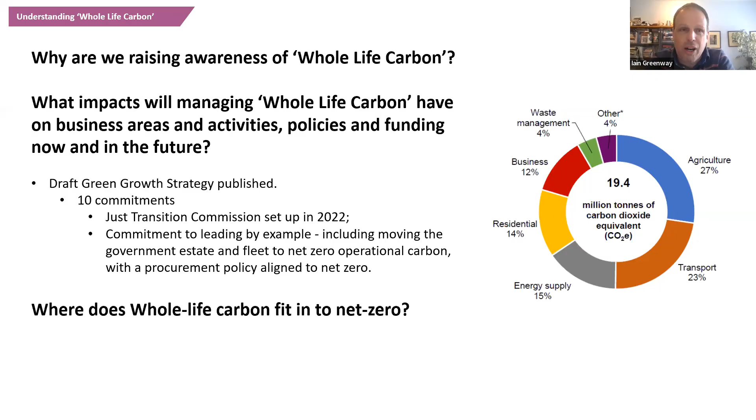So why are we talking about this at all? Why are we all here this afternoon? Well, we have now got a very demanding Climate Change Act in Northern Ireland. It sets targets beyond where the science can currently get us to. It's certainly a good definition of a stretch target. And you can see on the chart on the right of the screen that buildings account for a big chunk of that carbon, 14% there for residential and how it's split up. But you'll understand that some of the other parts of that pie chart include buildings apart from just the residential. So this is a significant part of our overall climate change challenge in Northern Ireland.

This diagram shows a very similar thing, but in a different form around a loop rather than in those building blocks. And you can see the operational carbon going, as I would say, from 8 o'clock to 10 o'clock on that loop. And you can see Carl Elefante's statement. As with all of these statements, it's perhaps oversweeping and an overgeneralization, but certainly we need to see the whole life, the whole cycle, and that probably hasn't been focused on sufficiently.

If I just take that back to the example we're going to hear about, the Erne campus, and Barry's going to talk about the tremendous world-leading work there to create a further education passive house standard building. But what was on that building site before? It was a 1960s hospital. That had to be demolished. What was the carbon impact of that?

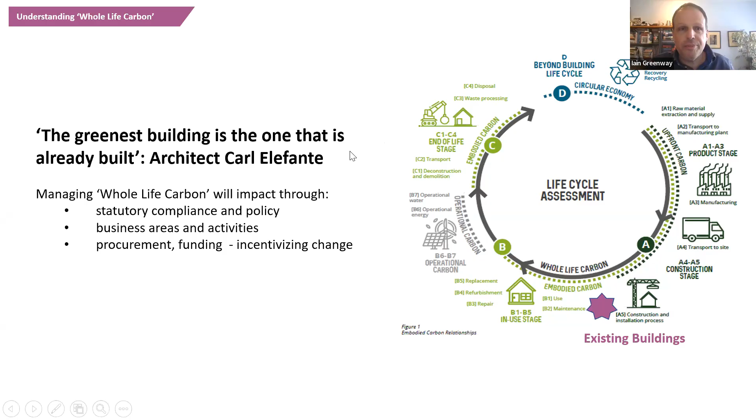And here are some points perhaps we can all think about as we hear the presentations and the discussion, including what leadership role we want to have, whether we work in the public sector or the private sector or the third sector. What is the role we want to play in getting this broader understanding, this broader focus, and indeed then this broader action to deliver on what we know we need to deliver for the planet as well as for legislation? What do our baselines look like? How do we audit to know how we're doing?

So hopefully this slide will give you a few pointers to think about, things to reflect on as you hear the other presentations. And a couple of slides very quickly to give you a sense of the broader pieces of work the Department for Communities is doing and how we're doing them. Departmental Management Board, DMB, as it says there, is actively interested and recognises its responsibilities around climate change, for instance. There has been some funding to move on with some electric vehicles and some solar panels, for instance.

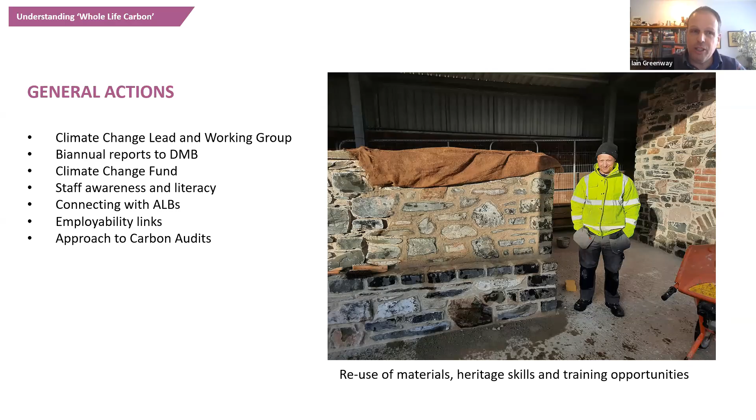And it's a pleasure for me now to introduce Professor Aoife Wiberg from Ulster University to get us into this subject more fully. I'm going to stop screen sharing and hope that I see Aoife emerging from her bubble on the screen. Aoife, are you there? Yes. Over to you, Aoife. You okay there? Yes, there we go. Okay, are we live? We are.

Okay, so I'd like to welcome everybody to the Embodied Carbon workshop. So we're trying a little bit of an experiment here. We have 110 delegates online, and we're trying to Zoom this together with you. So I shall begin. My name is Professor Aoife Houlihan-Wiberg, and I'm Director of the Architectural Research Group at the Belfast School of Architecture at Ulster University. Today I'm going to talk about embodied carbon and net zero greenhouse gas emissions in buildings and communities. So it's really about knowledge building for industry and academia.

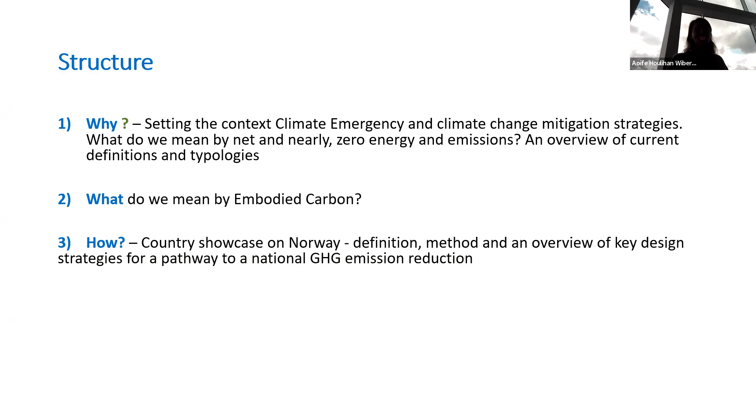So as you all know, we have a climate emergency which has been declared worldwide, and this has now been implemented into many local governments and jurisdictions. A lot of this has been already covered by Dr. Adrian Pugsley, but just to reiterate that the reduction of energy use and greenhouse gas emissions in the building sector is an urgent priority to limit global warming to less than 1.5 degrees centigrade in this century. So in response to this, a climate emergency has been declared. But I'd like to just begin with what do we mean by a climate emergency? This is defined as a situation in which urgent action is required to reduce or halt climate change and avoid potential irreversible environmental damage resulting from it.

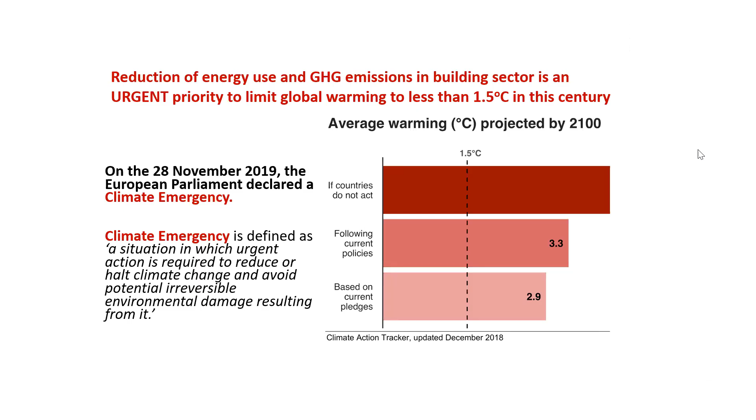So the global impact of buildings: building construction and operation accounts for almost 40% of global final energy use and almost 40% of energy-related CO2 emissions. So therefore, improving the environmental performance of the building stock and developing zero-emission buildings are really critical to avoid an increase in energy use and greenhouse gas emissions.

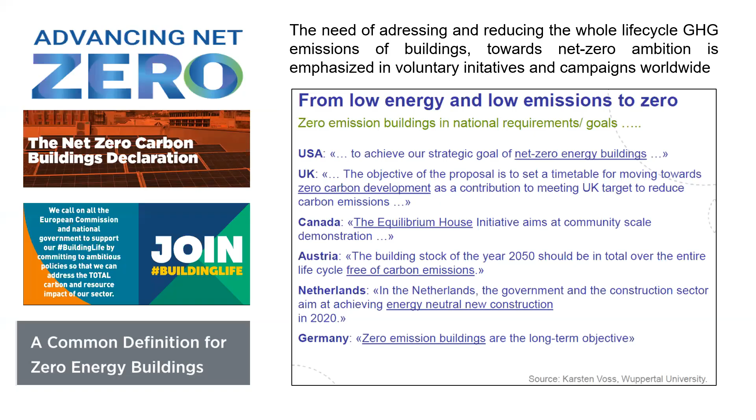So in the UK, a law has already been passed for net zero emission by 2050. So it's become the first economy in the world to do so. So it's not the only country. Every country in the world is really engaging and developing its own pathway and definition. So I'm just giving you a flavor of some from around the world.

But what you can see also, for example, to bring it a little bit closer to home, you have the UK Green Building Council. You can go onto their website and you can see that they give a definition on net zero carbon, and they do these really nice country profiles. So you can just click into Advancing Net Zero Snapshot and look at the different approaches around the world. So that's very accessible, and you should definitely share that with your organizations.

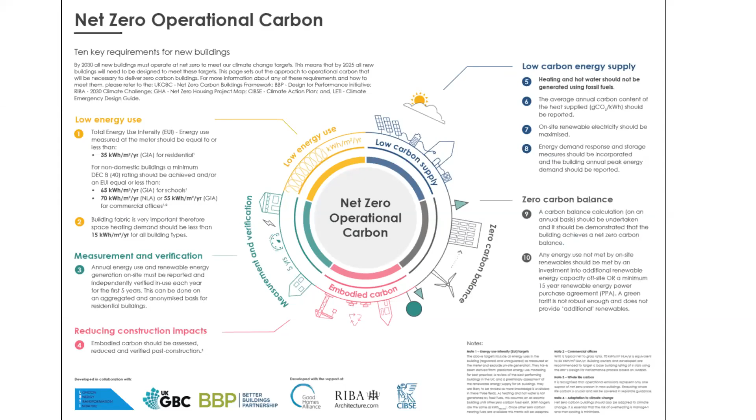As well as that, we have LETI, which Adrian spoke about already, and what they've developed is a really easy to understand embodied carbon primer. So again, we'd recommend that you go onto their website. It's very easy to understand, and again, share it with your organizations.

But, you know, with all these different pathways and definitions around the world, of course, it's starting to become a little bit of a Wild West, and it's a little bit confusing, I think, for organizations to really understand which pathway should we be following, what is really understood by these definitions. So I won't go into too much detail here, but just to let you know that I'm part of this International Energy Agency, Annex 72. And within that, we have a work package where we have conducted a survey of all these definitions around the world.

And what we're trying to do is to firstly get an understanding of what that definition means. For example, what are the boundary conditions that are included? Which metric are they using? Are they talking about energy only, or are they including embodied emissions? And what we want to get out of that is to develop a more transparent and standardized approach. So it's like an international definition framework, which different organizations around the world could refer to. And the idea then is that having a more standardized approach will mean that we'll have fewer misunderstandings and more reliability in those definitions, and hopefully avoid greenwashing.

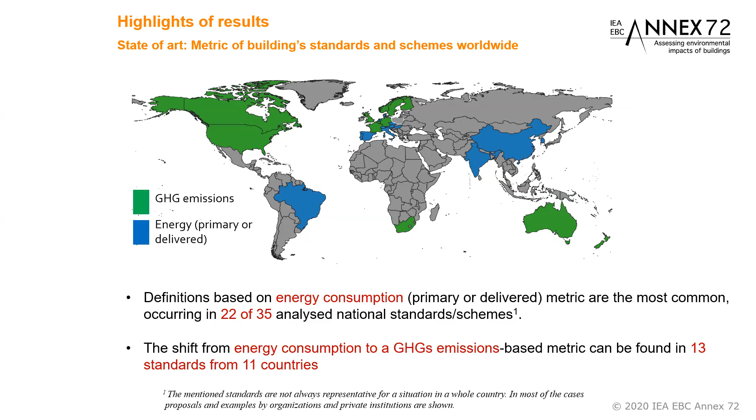So out of the 35 countries that we analyzed, what we found was that 22 of the 35 have definitions in place that are focused on zero energy. So those are shown in blue. But equally, what we found is that we have 13 standards from 11 countries which have made that shift to a definition that's including greenhouse gas emissions. So that's a really positive step. Again, there are 35 different schemes.

I won't go into it, but just to give you a flavor and a highlight, I've taken 4 countries here, and you can see that the definition is different. Some are talking about zero carbon, some are talking about zero energy, some are talking about net zero emission. So what that essentially means is that in some countries we're talking about just zero energy, and in others they're talking about including emissions from operation and embodied emissions from materials. So there are 2 different pathways. And some are calculating that on an annual basis, some over a 60-year period. So it's just to highlight these differences.

And what is interesting is that all of them are actually voluntary at the moment. And what we're seeing also is that a lot of the initiatives are coming from industry or research councils. So there's a real opportunity for industry partners and research organizations to actually be making a difference and leading the way.

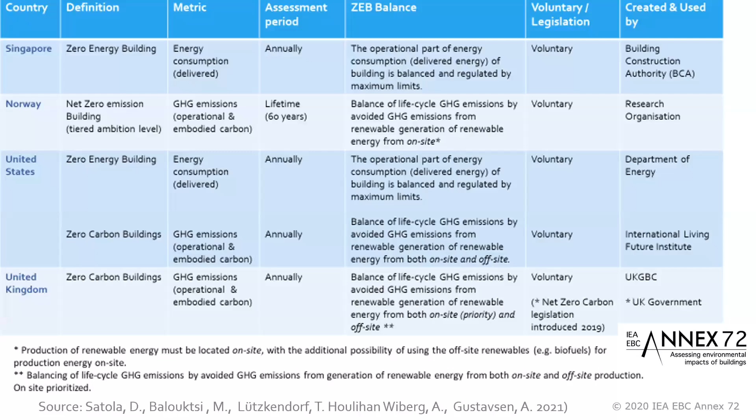So this is just showing you the different building standards and schemes, and these are all the ones that are referring to greenhouse gas emissions. But even within that context, you can see those different definitions. Some are using zero carbon, some are talking about net zero emission.

But the main recommendation from this is, regardless, there's a lot of momentum and a lot of initiatives worldwide, but all of these standards, schemes and approaches need standardization, and we need to start integrating this into national and local policy. But another key thing that we found is that different countries are at different stages of the game in terms of what they can practically do. So it's really important to have that framework and have flexibility within the framework, so different countries can all make a step, but at different stages. And then finally, in terms of compensating for the emissions used in a building, we shouldn't just focus on on-site compensation, because this isn't always possible to do at a building level.

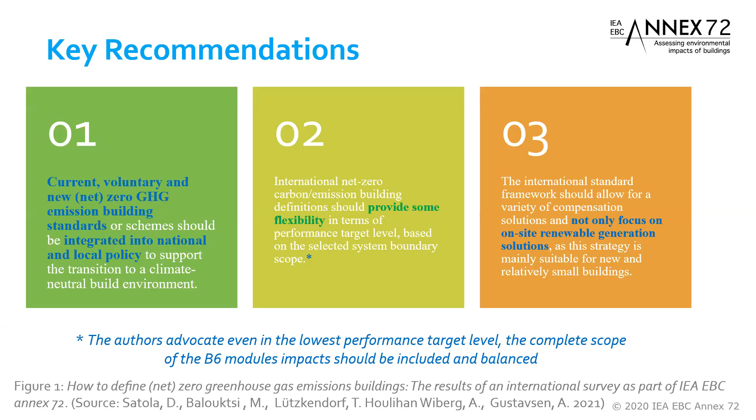And sometimes, that's more applicable for new buildings, but many countries are dealing with a lot of existing buildings. So we need, again, more flexibility on the possibilities. So you can read more about this on the link attached. So that's just giving you a little bit of a whistle-stop tour to the international perspective.

And then I just wanted to really now start in the second part on embodied carbon. So what do we mean when we talk about embodied carbon? So we define this in the IEA as the energy used in and the greenhouse gas emissions from manufacturing the construction materials, constructing, maintaining, refurbishing, and demolishing the building. So that is basically visualized with that image, the small diagram on the left. So everything included in the red circle is to do with the embodied emissions.

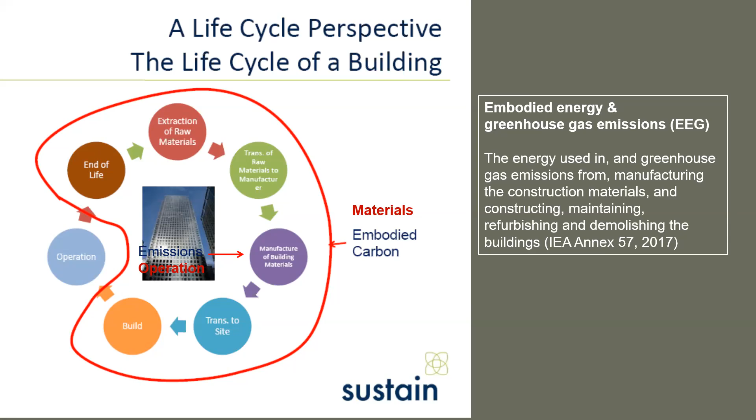So it's everything from taking the materials out of the ground, transporting to the factory, processing in the factory, transporting the material then to the site, which could be in another country. So you've got transport emissions. Then you're starting to construct it in the building. Then at the end of the life of the building, you demolish it, and then the further use. So all of this is the embodied emissions. And then, of course, we have the emissions from operation.

So this has also been touched upon already, but just to let you know that, when we calculate embodied emissions, we call this the life cycle analysis, and we do this according to standardized approaches. So this is showing you the standard that should be used, EN 15978. And what you can see there is A1 to A3 are the production phase emissions, A4, 5 is transport and construction emissions. Then you have the use stage emissions, so they're B1 through to B7, the end of life, the C modules, and then the benefits and loads beyond the system boundaries.

So that means if your building was deconstructed, if it was made out of timber, you may decide to send the timber to a waste facility where the timber is burned and that waste heat is used for heating a neighborhood. So that's kind of the next steps. So how do we measure this? So the unit that we use is kilogram of CO2 equivalent, and that can be per functional unit, which is per meter squared, per meter, per kilogram, etc.

And why is this important? Because for designers and other stakeholders, it's really important, particularly if it's integrated early in the design process, then we can see what the impact is from the different components used in a building. So that's very useful if this is done early in the design process, because you can go back to the drawing board if you start to see certain materials or components are driving high emissions.

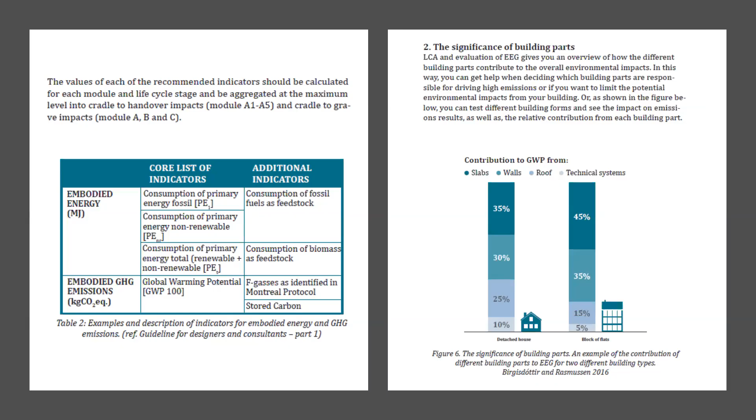And again, this has been touched upon already, but just to let you know, as we're shifting towards net zero emission buildings, they're becoming more and more highly energy efficient. And how they achieve that is using typically materials, the burden is shifting more to the embodied side. So what we see in zero emission buildings is that the emissions from operation are being reduced, but the burden is now shifting to the embodied emissions part for the materials used in the building and all the technical systems.

So why is this interesting? Well, it's interesting because if you're only looking at balancing the energy demand and you're not considering the embodied emissions of the material part, then you're missing the bigger part of the picture. So that's why we need to make this shift from thinking about nearly zero energy or net zero energy to a more life cycle approach. And another interesting thing when you're calculating embodied emissions and the LCA is that you can start to see a picture as well of where the emissions are happening in the life cycle of the materials.

So what you see, for example, if you do your LCA, is that you might have chosen materials that have high embodied emissions in the production phase. And so then you might think, well, okay, that could be concrete or any other material. I'm not saying just concrete, but it could be a material that is energy intensive. And then you might look, could I use a less intensive material for those production phase emissions? And so you help to reduce that part of the life cycle.

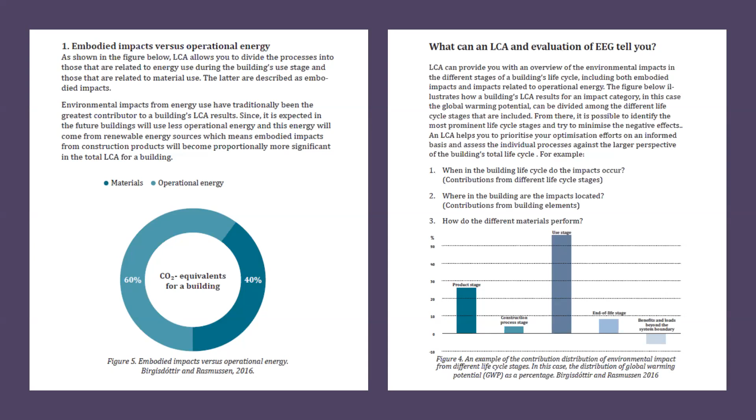And another part is, for example, as a designer, instead of choosing a material from far away, you may choose materials closer to your site. So you've got an opportunity then to reduce the emissions from the transport phase. Or instead of a highly technical or intensive production phase material, you might switch it for a more natural material like timber or something else. And again, you can reduce the emissions for that phase.

So you start to get an idea of what is the impact from the materials that I've chosen for the skin of the building, for the technical equipment, could be mechanical and ventilation systems. So what you can do then is, if it's done early enough, you can go back to the drawing board and switch out those materials that might be driving high emissions, and sort of do the sensitivity analysis for other materials. So how we do that is we tend to connect our 3D models with databases that have all this information on embodied emissions.

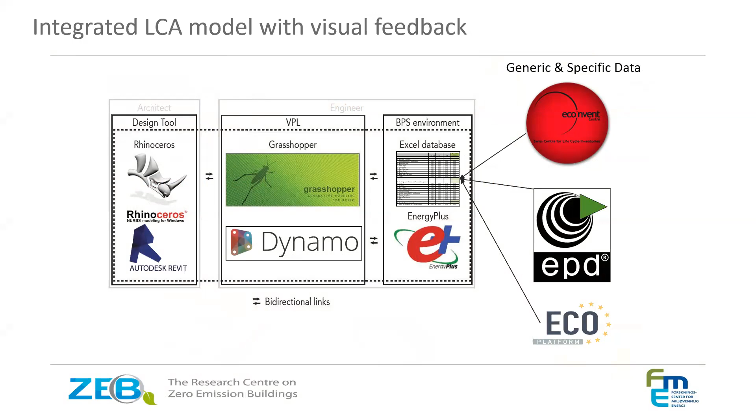And I'll go in a little bit on this, but you can use generic data, which is kind of more average data, particularly in the early design phase when you don't really care where exactly that particular material is coming from. But as you go further into the design, you may wish to switch it for specific data from what we call environmental product declarations. I'll go into that in a minute, but essentially what we need to do any embodied carbon calculation is material quantities. So you can typically get that from a 3D model.

But what I like to say to students is that you shouldn't rely on just tools available online. You really need to understand from the basics. So you can actually just get quantities from a drawing. You can measure quantities for a wall or an area of wall. And then if you know where to get the data from the environmental product declaration, you could do the calculations yourself. But then the idea is that you have a rule of thumb to make sense of what those numbers mean in the tools available online.

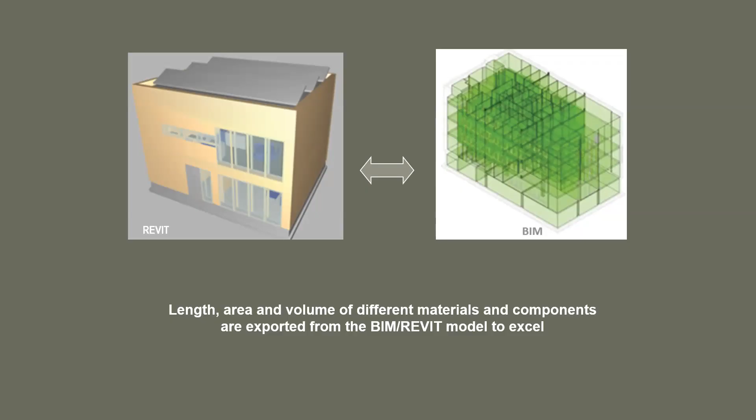So this is, in a nutshell, very, very simplistic, but essentially you have quantities of materials. You need to source emission factors for those materials from an EPD. And then you multiply them together to get the CO2 emissions. There's a lot more in this than what I'm saying, but just so that you understand the concept. And we get our data from different sources. These are just a selection, but in the ZEB work in Norway, we were using EcoInvent. It's a Swiss database. But more and more the EPDs have come on tremendously, and I'll just show you a little bit about those in a second.

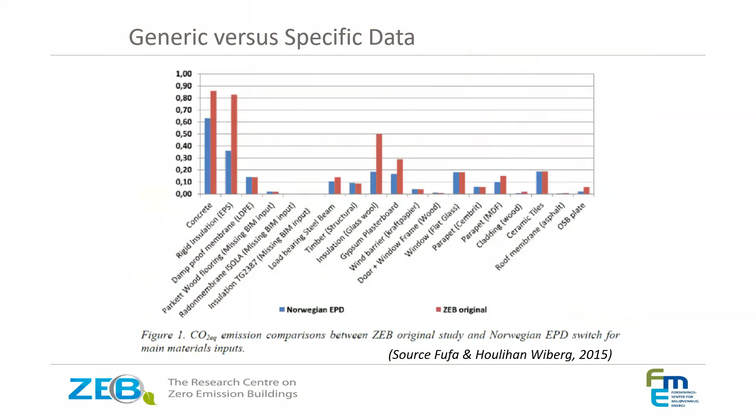But the beauty is, generic data gives you one result shown in the red. But when you switch for more specific data from a specific factory, then it's giving you more accurate data. So what we found when we recalculated using both was that the specific data from EPD showed less emissions in the results. So this is just showing you results from one of the pilots.

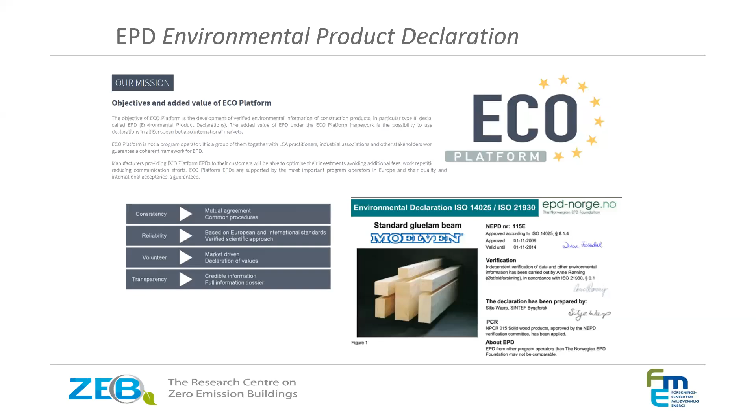So this is an EPD, and I'll go through a little bit about that. Are any of you familiar with environmental product declarations? Yeah? Oh, well. So industry partners, manufacturers, that's a really terrific source of information for us. And you can read through this in your own time. But essentially, an environmental product declaration is a document which transparently communicates the environmental performance or impact of any product or material over its lifetime.

So this is just where can we find reliable EPDs. So we refer to Eco Platform, which is a really great source. Anybody who is signed up and verified through any of these will have to follow and meet stringent requirements, product category rules, it's third-party verified. So it's a very reliable source of data. And that's really key when we do our calculations, because if people are just taking data from wherever, then that can really skew the results. So it's very important that you use accurate data.

So you can use Eco Platform, and you can also refer to the International EPD system. So I've given you some web links here. And just without going into a huge amount of detail, what do they actually look like? I mean, they're very comprehensive. They're about 16 to 20 pages.

But essentially, for designers and students, it means they can look. There's usually an EPD library, and you can choose insulation material, click on that. Then you can go in and say, I want to look at rock wool versus some other, it could be sheep wool if they have one available. And it's really terrific because they're following that standardized approach.

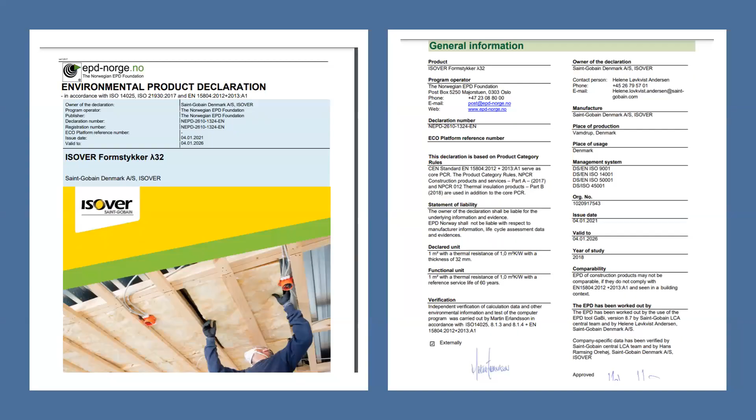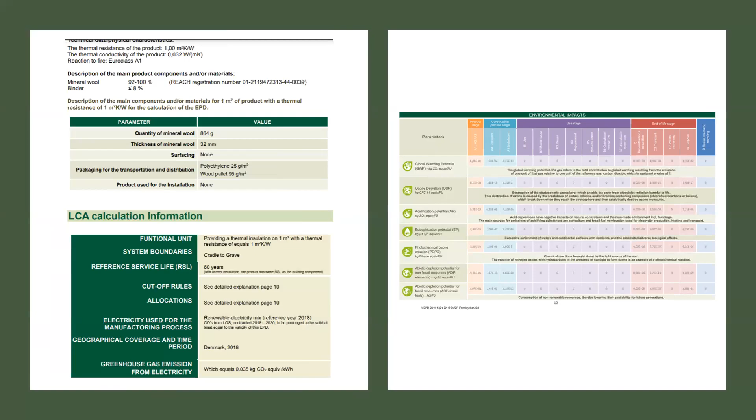And what we typically say is we like to use EPDs that are as recent as possible, because that takes into account the decarbonisation of the grid. Okay, so essentially, you have other impact categories which you can choose for. We tend to use the top left, global warming potential, and then you have your figures for different life cycle stages. So I think I need to move on to the next part. So that's kind of the nerdy bit done, and it's just a whistle stop.

So, okay, so what does this mean in reality? Well, I thought I'd like to showcase what's been done before. And so a lot of the work that's been produced here and that you're exposed to is coming from the Research Center for Zero Emission Buildings in Norway. So we're very grateful to the Research Council and to ZEB and ZEN.

So essentially, I touched upon this for those in the room, but not for those online. But Norway wants to become zero carbon by 2030. And to achieve that, the Research Council has funded these different research centers around the country, each looking at a particular pathway to delivering net zero. So the one that I was working in was the zero emission buildings one.

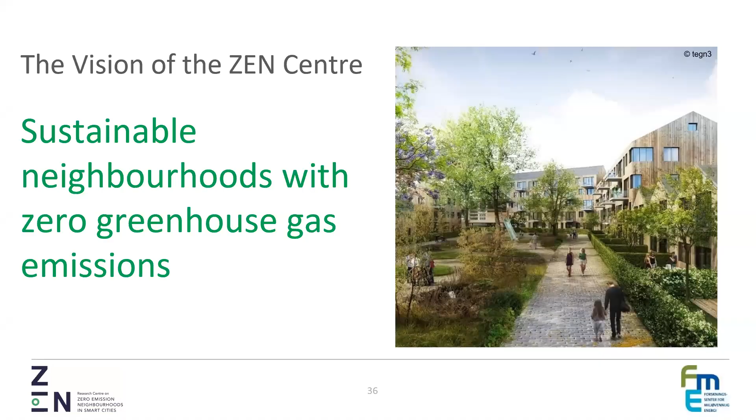So the main vision of the ZEB, which is building scale, and ZEN, neighborhood scale, is essentially to develop sustainable neighborhoods with zero greenhouse gas emissions. And how this is done is through reduction of greenhouse gas emissions, making buildings that are more energy efficient, using local renewable energy production, trying to reduce the amount of materials that we use, and obviously the energy use, and to use more environmentally friendly materials and try to reuse materials as much as possible.

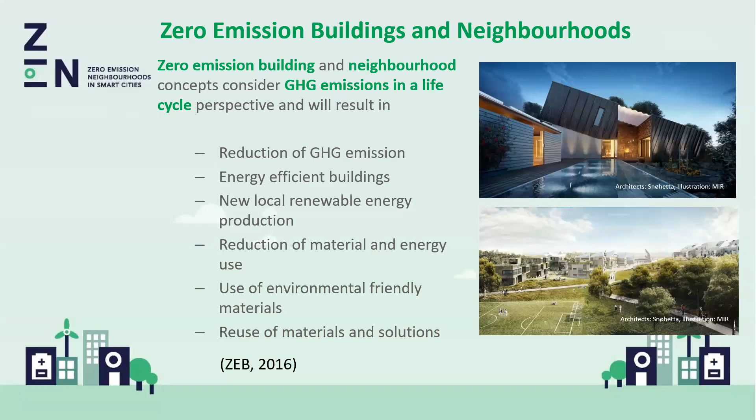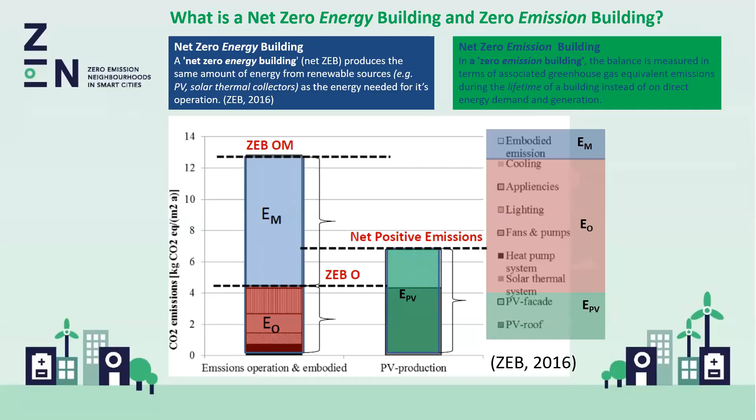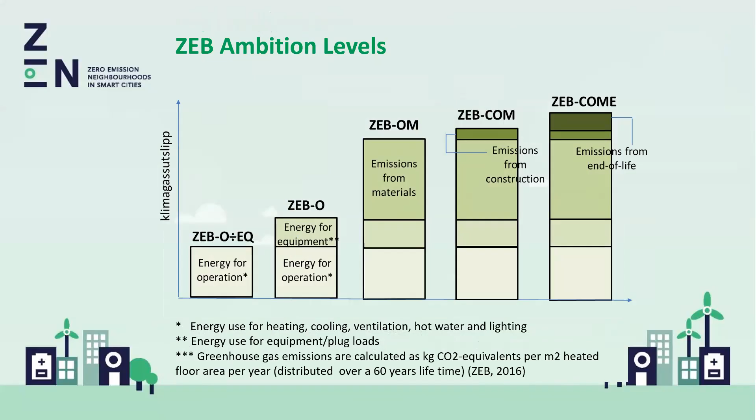So you have to start to think a little bit outside of the box and really integrate where shall I put my renewables, early in the design process, in and around the site. So there's a series of these increasing ambition levels here, which I've shown across the life cycle. So you've got balancing for the operational energy, ZEB-O; operation and material, OM; COM is construction, operation and material; and then the holy grail, construction, operation, material, end of life.

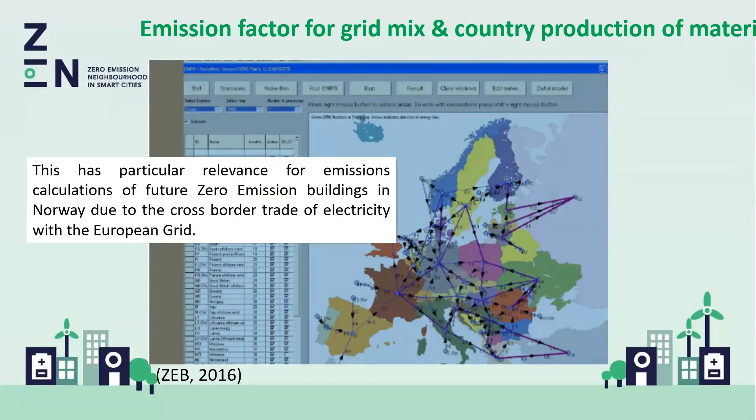Right, so, not too much detail, but again, it's going to be really important for you in Northern Ireland to understand the grid mix. What are the plans for decarbonisation of the grid mix? Is there any exporting and importing of electricity in and out of the country? Because that really can affect the emission factor that you need to use.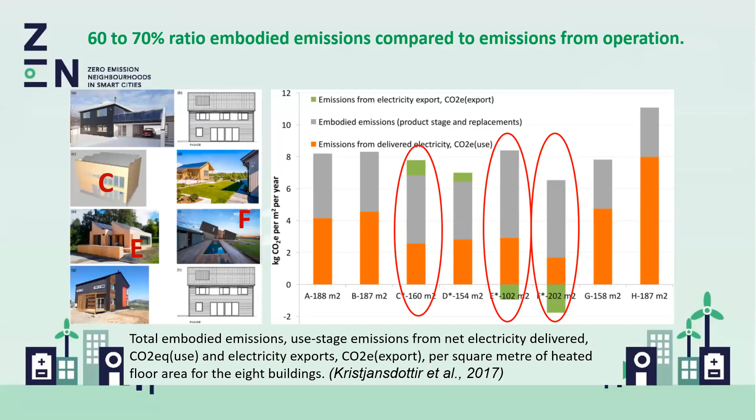And when we do these calculations for embodied carbon, it's really useful for us as designers, students, etc., to see where the high drivers of emissions are coming from. So typically in the ZEB pilots, repeatedly those were coming from the PV. Typically concrete was used in the foundations, and then EPS insulation, because it can get very cold. So it's very important to have really good insulation to the foundation, sometimes the roof. But just because they're high drivers, it doesn't mean that that's necessarily bad. It's just good to know.

And then you can make, as a designer, concerted efforts to choose other materials in the rest of the building that have much lower embodied emissions. Because you actually need the PV to create the ZEB in the first place. You need the concrete for the pad, or it could be strip foundation, but you can start to look at alternatives. It could be blue concrete or other alternatives.

And I think I really need to move on now to taking the research to real buildings. So the ZEB Center was the predecessor to the ZEN Center, which is focused on neighborhoods. I'm not going to have time to go into that today, but the ZEB Center ran for a period of 10 years. So it's really important to build upon and share that knowledge rather than reinvent the wheel, because the definitions have been created, the calculation methodologies are there and the pilots are shown. But everything will be different when you start to adapt that to different contexts worldwide.

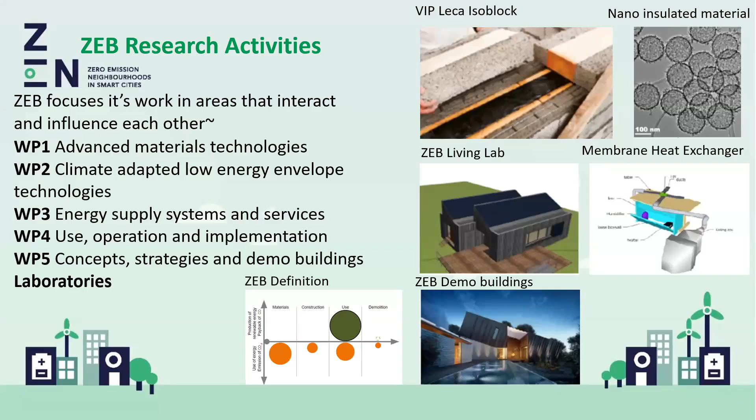And then it ranges: developing materials in the lab, scaling up, developing new components, having living labs or test facilities where industry partners can come and actually test and see these new materials being developed, and then making the bridge from theory to practice. So having pilots where we can really bring all the research together and showcase how that is delivered in reality. So the pilots were such an important part of the ZEB and ZEN Center because they provided an innovation hub where researchers, industry partners, students could come and really be inspired to be in a real building that is a ZEB.

And it also helped to verify the theory because you can do the best simulations, but in reality the actual consumption, et cetera, is always different. And that actually is really influenced by humans and how we use buildings. So it's important to have living labs where we can test human behavior and energy consumption.

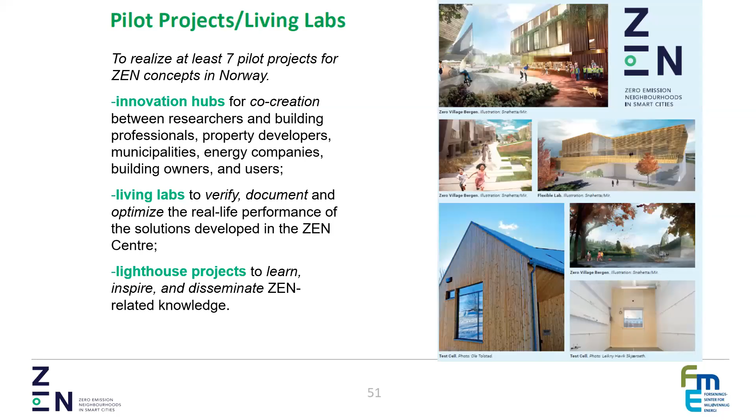And so the biggest priorities are really put on passive design in the beginning, and then good material choices and reducing the energy consumption as low as possible. But you always need a bit of energy in the building. So then when you get it as low as possible, you try to balance it with renewables, those active systems that Adrian has spoken to you about.

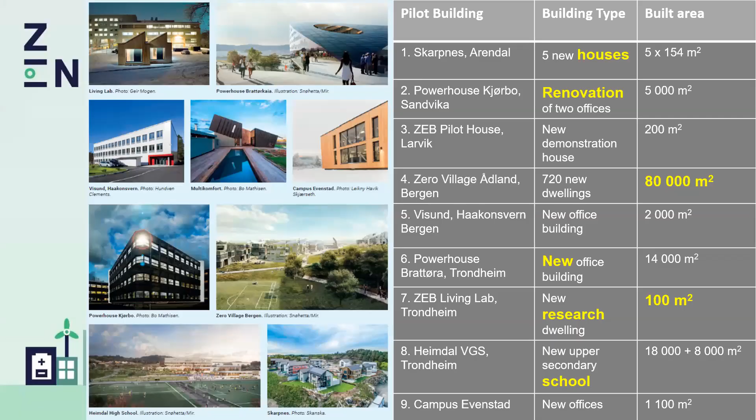So then you have all the different ZEB pilots. These are the ones, like I said, for building scale. And there's a new research center that's been running since 2017 at neighborhood scale. So there's 8 neighborhood scale pilots you can also look at. But for these, you can just go onto the website zeb.no. And what you can see is the middle column is showing you the different typologies. So it's really good to look for a building that's similar to what you're planning. But you can also see they range in size from 100 square meters to 80,000 square meters.

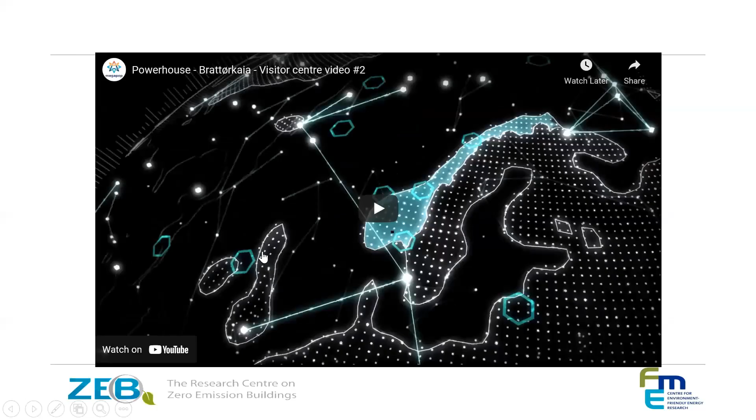So a quick 1-minute video, if it works. Let's see, I don't know if I did the share video computer sound.

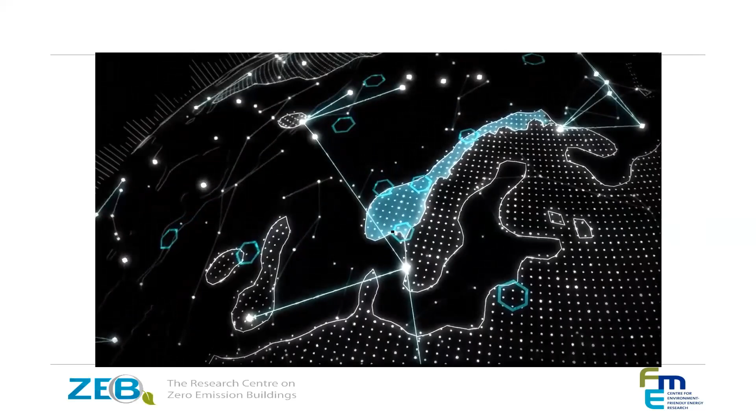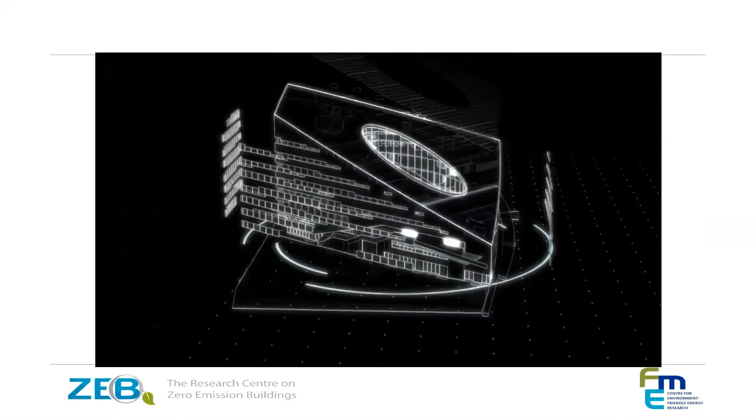In the last 150 years, the global average temperature has risen by 0.6 degrees Celsius. In the Arctic, the temperature has risen twice as fast. This is man-made, and our emissions continue to increase. Norway's emissions per capita are double the global average. We must work together to reduce our climate footprint. To do this, we must make conscious choices before it's too late. It takes a vast amount of energy to build, run, and demolish a building. Buildings account for 40% of global energy consumption. That is why, in order to adapt to climate change, we must build smarter. Building smarter not only saves the environment, but also money. And most of the technology we need already exists. With Powerhouse, we have created a building that will produce more energy than its total consumption, from cradle to grave. See how we did this, and how we can change the way we live and build.

Okay, so let's see. I think I only have about 3 minutes left, so I'll just show you very quickly this ZEB pilot, and then I think I need to call it a day. This is a sort of demo building, a live living lab. It's a residential building designed by Snohetta.

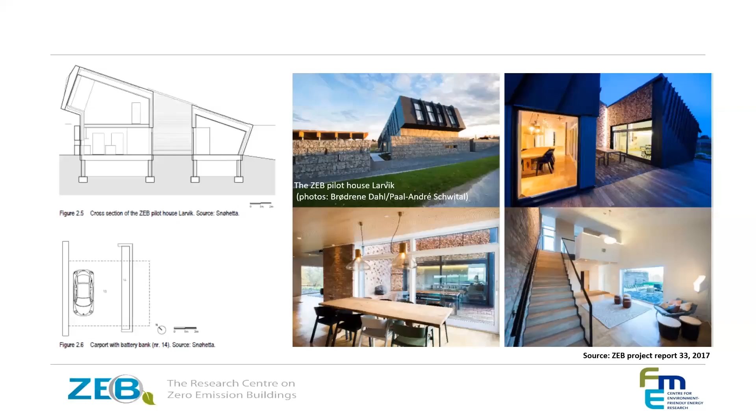And what you can see here is quite typical, I would say, of approaches to ZEBs in Norway. The buildings are typically orientated to the south, 15 degrees off south. And the form of the building typically has roofs angled to the south. That allows you to put the PV on the roof, but it can also be on the skin of the building. So in this one you have photovoltaics for electricity generation,

but you can see that the plan of the building starts to get quite deep and dark. So they cut out this atrium in the center, which allowed daylight to get into the middle of the building, so you use less electricity and have more natural light. There are solar collectors in the middle part providing hot water for the building, and they also used an old shipping container for the swimming pool, which heated the water for the swimming pool.

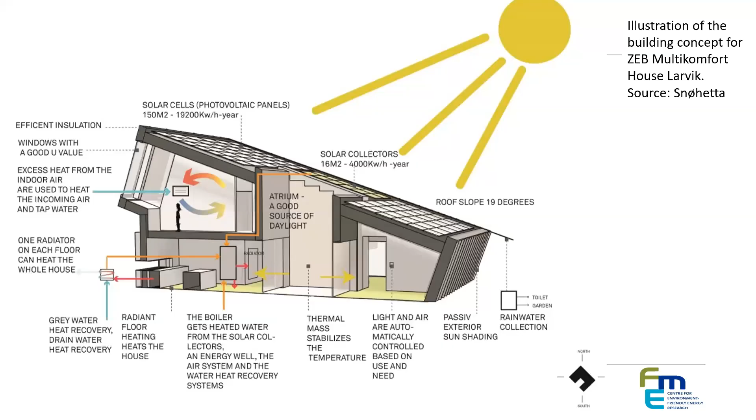So you have a combination of the photovoltaics, solar collectors, ground source heat pump, and they collected the rainwater, etc. I think I'm going to have to really wrap up, but they had a large area in the center of the building that needed thermal mass. Originally they thought about doing that in concrete, but that was quite high carbon. So they looked at a blue clay concrete, which uses clay from around the site, which reduced emissions.

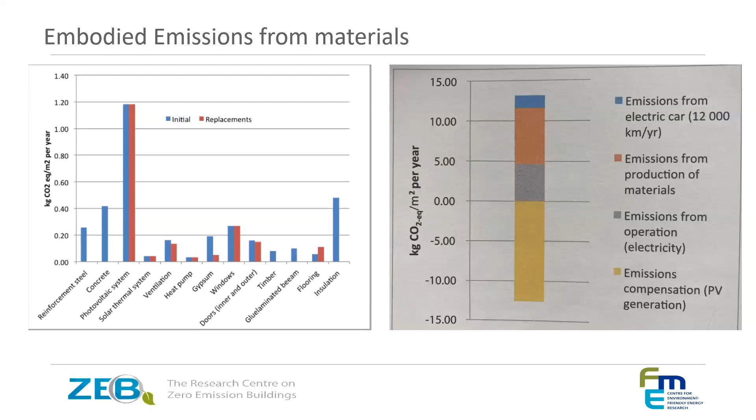But in the end, they went for reused brick from a site nearby, and that gave a real character to the architecture. And they used wood from nearby the site as well. So the main thing is this building demonstrated ZEB-OM, so it balanced its emissions for operation and materials, which was terrific. And then I have some other solutions, but am I really at the end now?

Probably, yeah. I'll show you one last video and then I'll leave it there. So this one is nice. It's showing you a retrofit of an existing building.

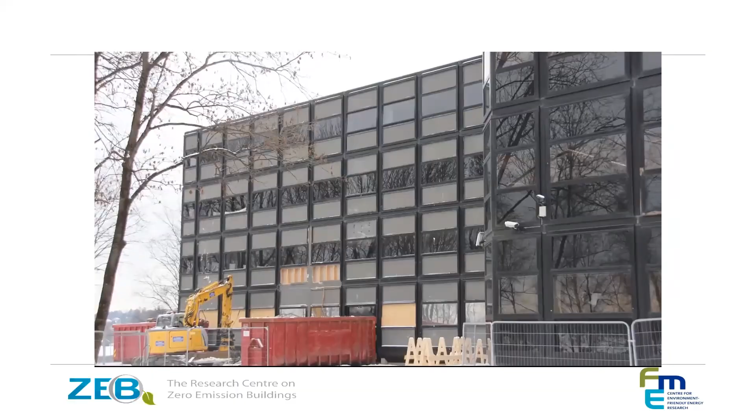By combining and optimizing existing technology in new ways, an ordinary office building from the 1980s can produce more energy than it uses. The key phrases are new ways to work together, competitive prices, and practical sense. In Sandvika, the Powerhouse project is completely changing how we view buildings and energy. The construction industry and existing buildings account for much of the energy consumption in Norway and around the world. In fact, 40%. Energy use and emissions are closely correlated. By combining very low energy consumption with local energy production, office buildings can become a source of energy,

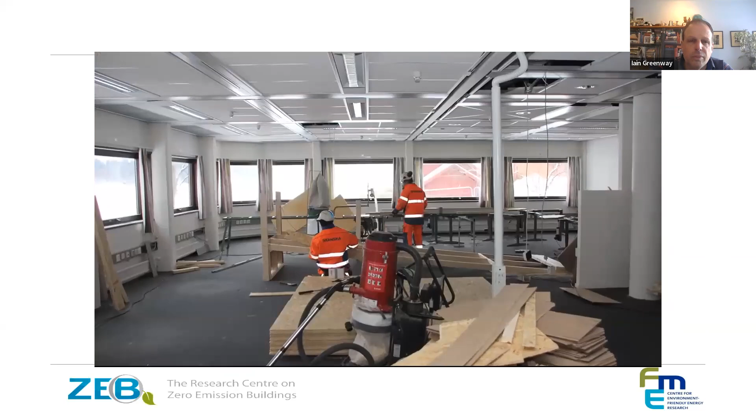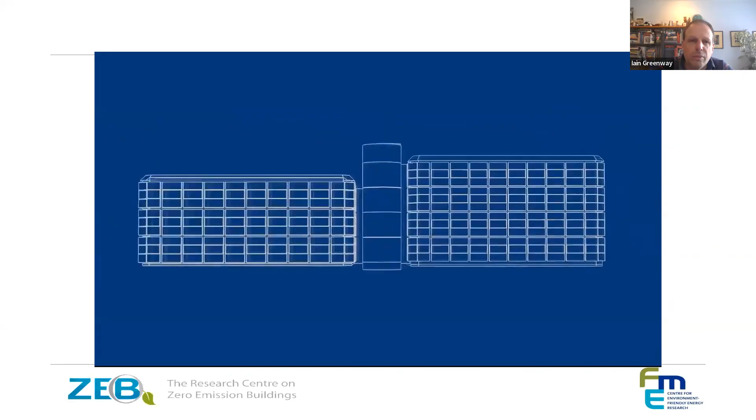a part of the solution. Powerhouse is a partnership established by the environmental organisation Zero, Entra Eiendom, the contractor Skanska, the aluminium company Hydro, and Snohetta Architects. The ambition is to develop and realise buildings that produce more energy than they consume over their lifetime. As far as we know, Powerhouse Kjørbo is the first project in the world to transform an office building into an Energy Plus building. The building will be finished being converted in February 2014. Asplan Viak is the technical consultant and will also be the tenant. The project has shown that it is possible to reduce the energy consumption by 90%. Reusing concrete constructions and other components provides substantial energy gains.

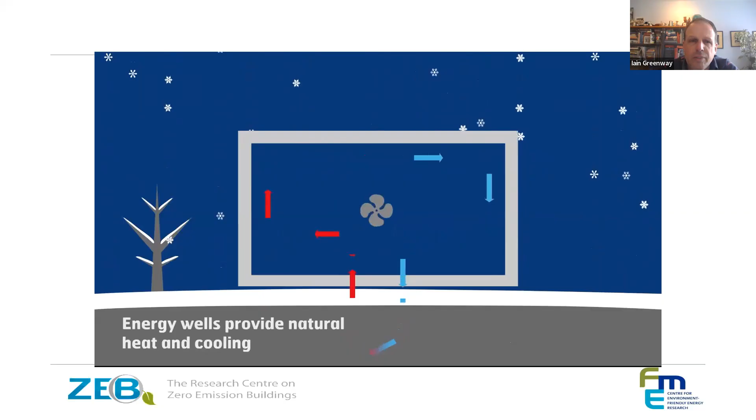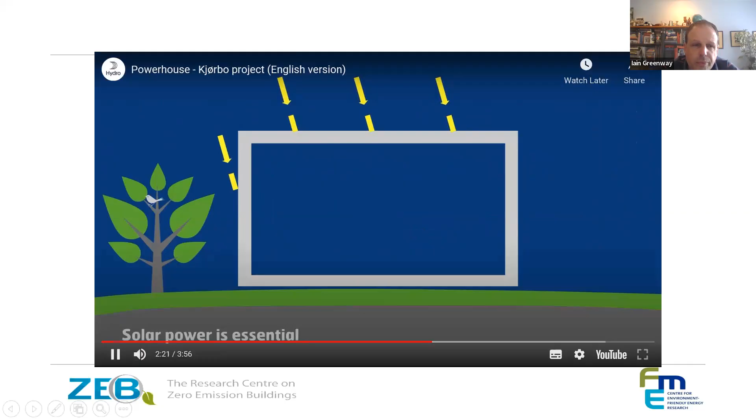Heating is energy intensive. Reuse of ventilation heat is therefore vital. Concrete surfaces are good for even temperatures. Knowledge of materials, new and old, is vital for realizing smart solutions. At Kjørbo, energy wells in the ground provide energy to the heat pump installation in the winter and cooling in the summer. Solar power produces ample energy, around 200,000 kilowatt hours a year. This is more than enough to cover the demand for energy. The power can be supplied not only to the buildings, but also to the power grid. Energy wells and district heating contribute to the heating of hot water.

Walls, roofs, and windows are planned with extremely good insulating properties. The building's overall need for energy, heating, cooling, ventilation, and lighting is very low. And the result will be like this. Externally, we have retained the original expression in black. Burnt wood gives a natural and maintenance-free facade with lots of light. In the project, we have found new architectural concepts that integrate technical solutions and use materials that insulate and ensure a good interior temperature.

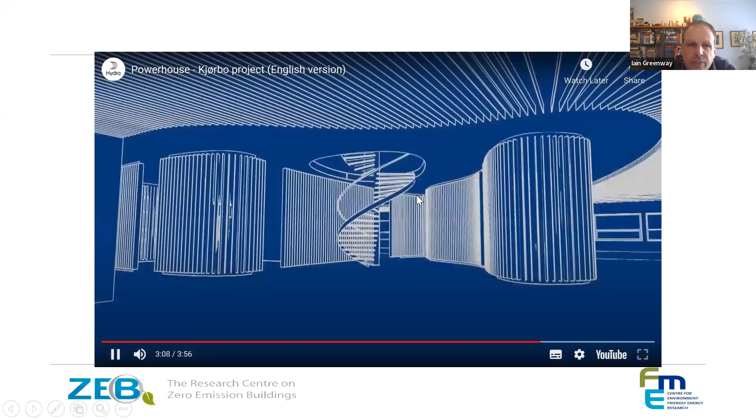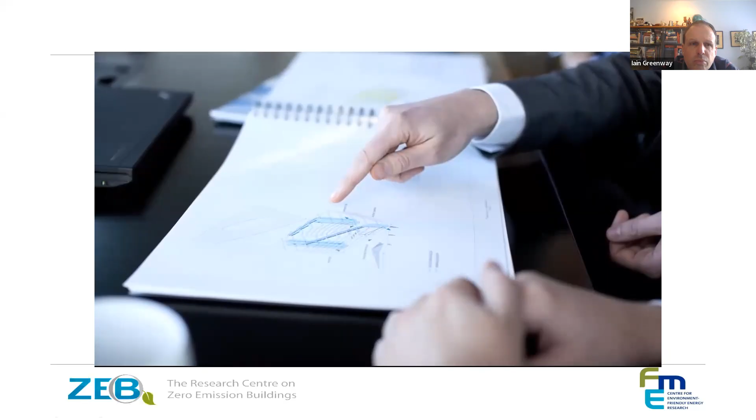Despite the building's large output of energy, there will be a periodic need for input of energy. Powerhouse Kjørbo is being built using existing technology and available expertise at a competitive price. The really clever solutions come from the new cooperation processes. Powerhouse Kjørbo is a unique project, but it is fully possible to use the concept in other transformation projects and on commercial terms. Instead of being a challenge, buildings can be a part of the solution.

And I think that's a perfect ending. So thank you so much. Thank you. Golly, audience feedback as well. We forget what that's like in these virtual meetings. So that's brilliant. Thank you very much, Aoife.

I am going to move us straight along. There's enough to explode my head anyway in that, but I'm going to move us straight along to Barry McCarron from Southwest College to give us a more local example as well. And then we'll come back to Aoife about the way forward. But to keep us on schedule for a half-3 finish, I will head straight over to Barry.

Barry, you're on mute there as well. Thank you. If there was a pound for every time we heard that.

Okay, so I'll just introduce myself. So I'm Barry McCarron, Business Development Manager here at Southwest College. And a significant part of my brief here would be managing research and development projects with a team of approximately 20 staff. And we would be engaging with industry and doing work similar to that centre in Norway in many respects, just at a micro level here in Northern Ireland. And some of the recent projects we would have would be in the whole area of embodied carbon and carbon counting with some of the concrete companies as well. So I'll try and pick up these strands as we go through and dovetail with what we've seen from Aoife in the first presentation.

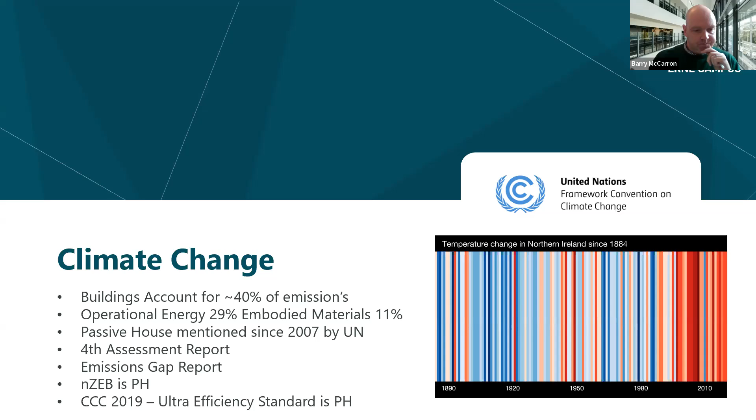So again, if we move forward, I just want to sort of talk about why the Southwest College went after Passive House and how that all came about. The first thing is to say that this has been about for 30 years now, actually 31 years now as we're into the new year. And it's the fastest growing building standard in the world. It's known for its energy efficiency all over the place. And for us, it was also an opportunity to do best practice, but to also try and wrap into it opportunities. And that's working really well for us to date.

The other thing as well, which again, it's a bit of a myth that people would have about the Passive House standard, and it's one of the things that attracted us to it, is that it's an open source standard. So if you want to do it, you don't really need to engage with the Institute or anyone. All the information you need is out there and readily available as well.

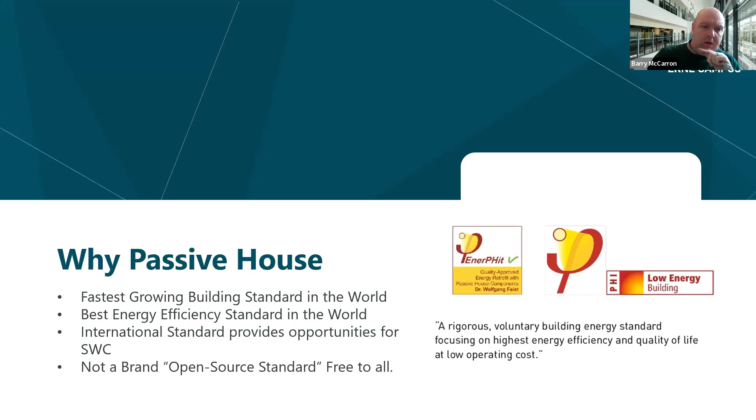So again, my keyboard and mouse are in two different pathways here.

Yeah, so underneath the standard, if you like, the whole realm of Passive House, there are 5 classifications within this. And what's really good about Aoife's presentation and me, and we didn't rehearse this, is that there's a synergy here. Aoife was talking about the tech standards, Tech 10 right through to Tech 25 in Norway. And again, I can see a complete synergy in what I'm about to talk about. The 5 classifications of Passive House start off with a Passive House low energy building, which is just below Passive House Classic, where they relax the air tightness level that you can achieve, and also the numbers that you have to hit in terms of kilowatt hours.

And then you've got EnerPHit, which is the retrofit standard, and I myself here at home, I'm about to embark upon that journey, retrofitting the house that I'm sitting in. And then on the other side of it, and again, this reflects what Aoife was saying, you have Passive House Plus and Passive House Premium, and that's very similar to Tech 20 and Tech 25 that was mentioned in the previous presentation. So I'm going to talk a little bit more about them because our own building is Passive House Premium.

This is a little bit that I worked on this morning around future building standards, and something I want to try and illuminate, and maybe people will want to engage with this afterwards in the discussion. It's really important, I think, from my perspective on what learning we've had in the college with respect to our journey, that we really understand where we're at with building regulations. And this just isn't a Northern Ireland drumbeat. It's also the UK and Europe. Passive House is still better than most building regulations across Europe. But we've seen a big example at the start of Aoife's presentation about the 1.5 degrees. We've seen COP26 at the back end of last year. The climate change imperative is right here staring us in the face. And our building regulations are not enough at the moment.

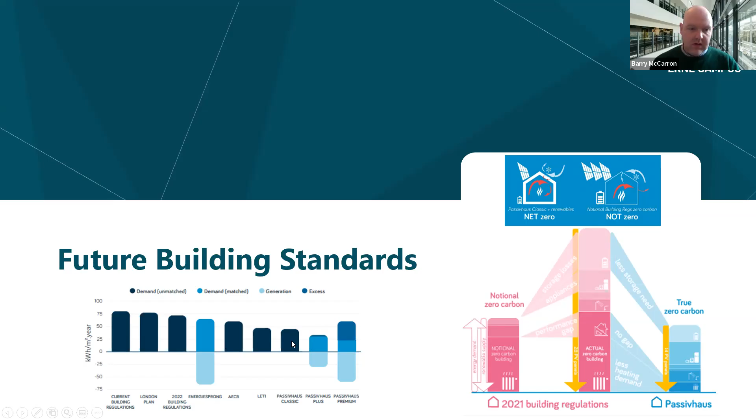And you'll also see in the other standard here just exactly where Passive House Premium and Passive House Plus really deliver with respect to some of the other building standards. The others are all good, but this really is best in class, is what I'm trying to say.

Another thing I want to talk about with respect to Passive House is also how there's a change here as well. The Passive House Institute in Germany sort of feel like they've got operational energy sorted. The Passive House standard will deliver all of that. That's already proven. And there is a focus and a shift from them into embodied carbon.

And the latest tool that they've had now for about 2 or 3 years, and this was developed in the UK actually, is a software called Passive House Ribbon. So if you're using the tools PHPP, DesignPH, and SketchUp, this is just almost a click of a button or a couple of clicks of the button, and you have your embodied carbon data alongside this as well.

And we heard there as well from Aoife about the integrity of the data that is inputted. And this is something that's a huge success with the Passive House Institute as well. In their PHPP software for general energy calculations, they always make conservative assumptions and make calculations that are not optimistic, which means that you don't end up with a performance gap, along with a couple of other things.

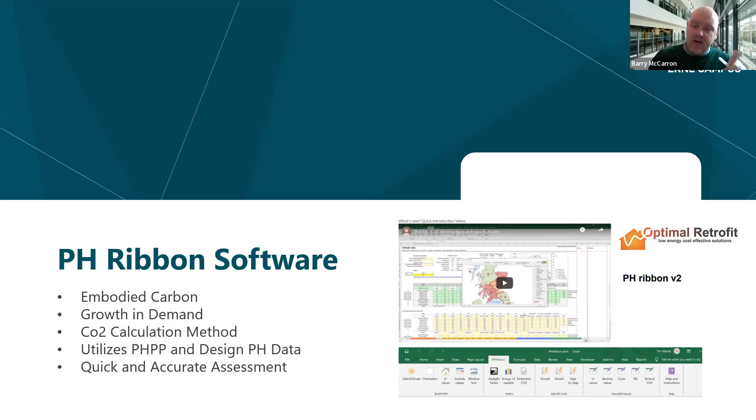But when it comes to the whole area of embodied carbon, this is also an area where we've seen earlier with Aoife that there's an opportunity to not cook the books as such, but the information that you put in is very, very important. And what happens with this PH Ribbon is they are using the most conservative data and conservative assumptions when we're calculating CO2, which means that you probably end up with a true figure. So I'd expect with this software, you won't end up with a performance gap with respect to embodied carbon as well.

So for us in South West College, all this started back in 2015. We built the CREST Centre, and that's at our skills centre in Enniskillen, just outside the town. This was part of an EU project. It was not seen as a free hit, but we were the lead partner on the project, which meant we had a capital build, and it was an opportunity to do genuinely best practice. And we put our best foot forward on that, and it's been an excellent success for us.

Now, you could say that this was in effect a pilot building, and that's what it was when we consider where we are now with the Erne campus. So this was a £1 million project, and it really helped the business case, with some of the post-occupancy research we did, to securing the £30 million Erne Campus, which is Passive House Premium.

It also allowed us, in my department of business development, to become an agent for the Passive House Institute, delivering their tradespersons course, their designers course, and now their site supervisors courses as well. And we have about 300 people trained in that in Northern Ireland. They're quite modest numbers, but in the Northern Ireland environment, that's still quite strong.

And then I suppose just to show you the before and after, if you like, of what we have done, I have to show you the before. This is our existing college campus. It is, as you can see, a building of its time. I personally think there's a great opportunity with this building for a retrofit, because if you put your Passive House goggles on and look at it, the form of the building is excellent.

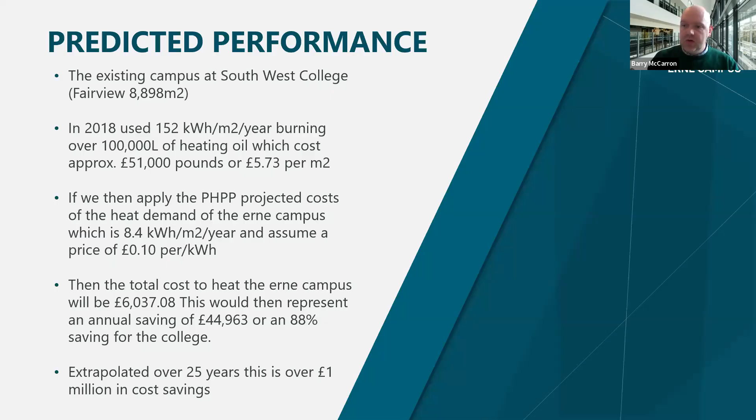And that in comparison to the 51,000 is a 44,000 a year saving, or nearly 90%. And if that's extrapolated over 25 years, or a typical lifespan of 50 years, you're talking 1 million or 2 million in terms of saving. And that's very conservative going forward.

So these couple of slides I'm just going to gloss over. I'm not going into detail with respect to U values, but it is important to toggle through them from the perspective of how it all works. There's 5 principles we say when delivering the Passive House training. The first principle is your building envelope: your floors, your walls, your roof. You need to do as well as you can with your building fabric. The lower you can go with the U values, the better.

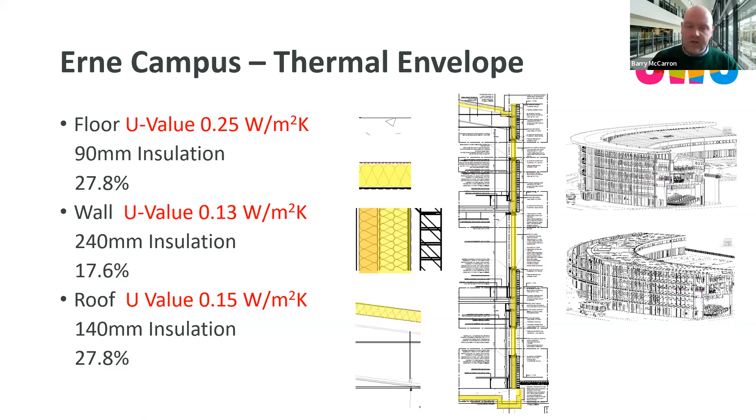Another consideration might be the proportionate area of each of those elements. My own retrofit building at home is going to be a bungalow, so I've got a disproportionate floor area to wall. So it would be better for me to put more insulation into my floor than maybe my walls. But number one principle is your thermal envelope.

Number 2 is, if you're really enhancing that thermal envelope, the junctions become all the more important. So you have to consider thermal bridging. And perversely, it sort of doesn't make sense: the more insulation you add, the more danger you have of mold and condensation. So this is a really important aspect with respect to low energy buildings. I would fear that some jurisdictions, if they adopt an exclusive approach to lowering U values and don't do enough on thermal bridging, may have issues with buildings going forward.

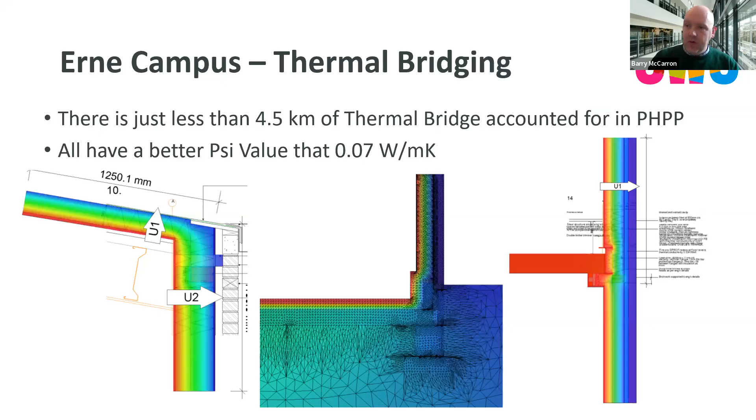A good example with respect to the Erne Campus is there was 4.5 kilometers of thermal bridging in this building. Imagine that wasn't calculated like you're seeing in some of the pictures here. That would be 4.5 kilometers of thermal bridging just left with heat running out through it. So it is a really important metric.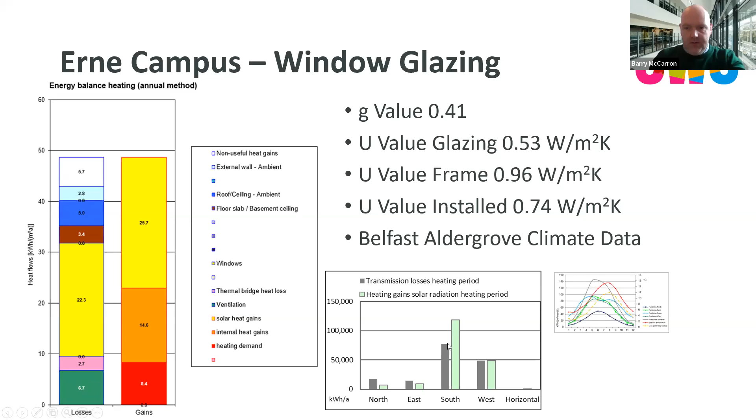It's not actually, and that's what this little, if you can see my mouse moving here at the bottom, this other chart that I included also shows you each of the orientations. The one that's the most damaging is the north. So if you end up with significant glazing on any building on the north in this part of the world, it's probably going to do you more harm than trying to really go mad on optimizing south glazing. But there are metrics you have to hit there for Passive House as well with respect to the glazing. So that's 3 of them covered.

The last 2 go hand in hand. You make a building airtight in order to facilitate mechanical ventilation, and in particular for Passive House, mechanical heat recovery ventilation. I can't stress these 2 parts enough, and this is a common area to fall down with low energy buildings. You are making the building airtight. So if you just stop there and just absorb that sentence, to facilitate mechanical ventilation.

And a good example of that is your car. If you get up on a frosty morning, you're going down the road, the car is largely weatherproof and airtight with the windows up. And if you turn on the blower in your car, which is recovering heat from the engine, same as the mechanical heat recovery recovers heat from the building. But if the 4 windows of the car are down, it won't matter how good that MVHR system is or that blower in the car, your ears are still going to be froze with the air getting in all around you. So it's really important to remember that those 2 go hand in hand.

And for the Erne campus, one of the other things that was really surprising to me at the point in time that this building started, the bigger a building is, the more opportunity you have to achieve a lower air tightness. So the air tightness level for the Erne campus wasn't actually 0.6, it was 0.4. So we got a really, really low air tightness, and quite easily. The contractor hadn't built a Passive House before, and they got this on the first hit. So credit to them, but it also shows what a big building can do and how easy it is.

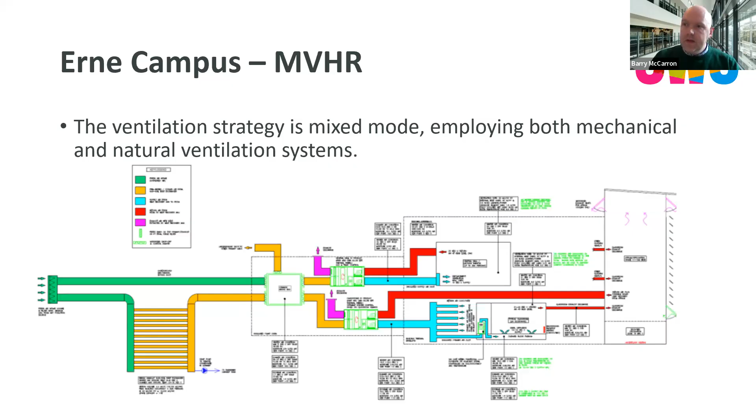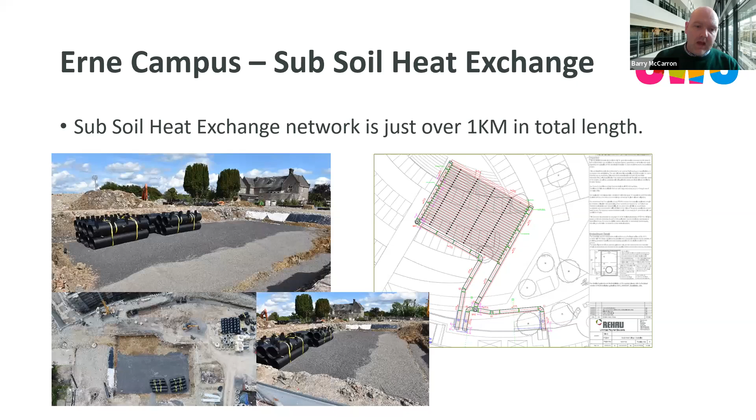This is the earth tube system. It's basically a subsoil heat exchanger. There's over 1 kilometer of tubes out in the car park. And Ian mentioned at the start, our workhouse, you can see it here in the background on the site. It's going to be opened later on this summer, and it'll really add another bonus to our Erne campus, and it's going to be an excellent event venue. So I'm really looking forward to that being opened as well. It really will enhance the site. But these earth tubes are just in front of it under the car park, and there's 1 kilometer of them. So as I said, they preheat the air at this time of year and they cool it in the summer months as well. So it's a nice innovative solution to have to talk about on site.

The heating for the Erne campus is a combined CHP unit or a micro CHP unit, and we also have an air to water heat pump that services the atrium as well. So the CHP unit is covering about 80% of the space heating, all of the hot water demand, which is quite significant, and then in addition to that, the other 20% is picked up with the air to water heat pump.

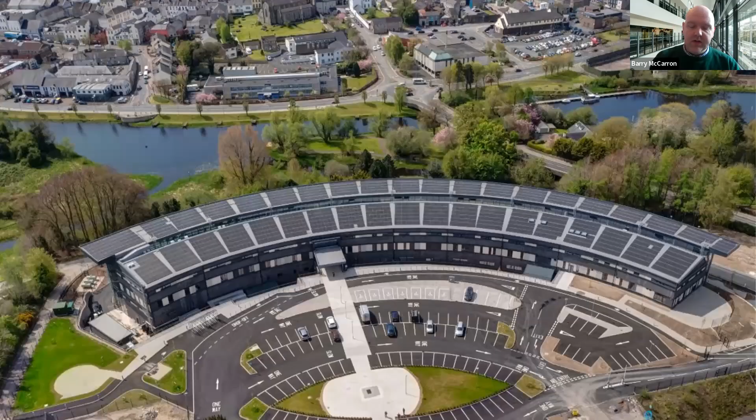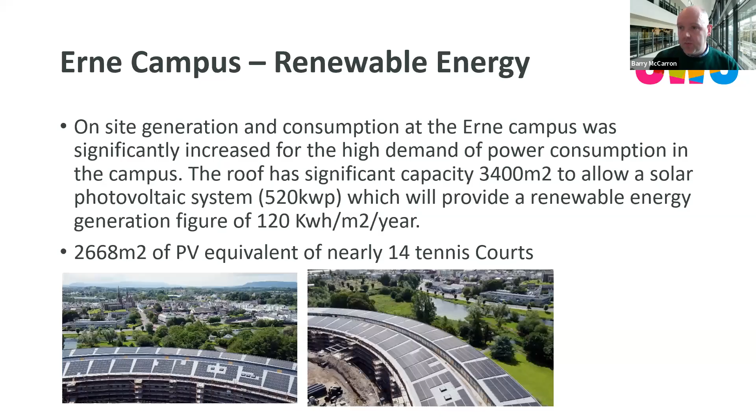Yeah, there's the size of the system. It's a 520 kilowatt peak system for those in the know. Just to give you a proportion of size, it's about the size of 14 tennis courts of PV panels up on that roof. And some other nice photos.

Again, we have significant battery storage in place as well to just sort of take the peaks and troughs off that system. And that's sitting at about 460 kilowatt hours of battery storage there as well. And again, you can see a screenshot of the PHPP software and how all of that means that we hit Passive House Premium.

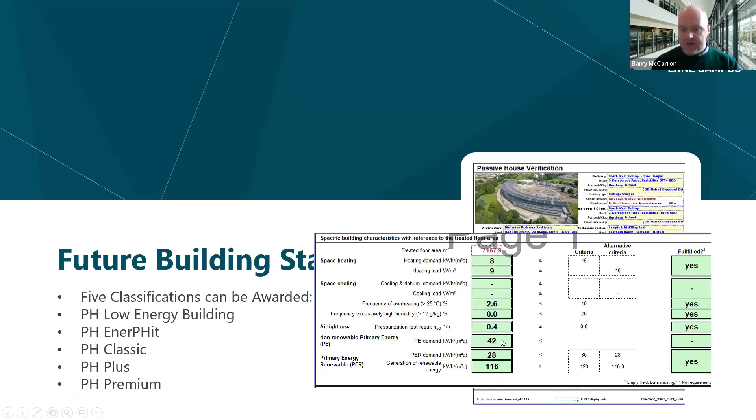On this slide here, I just included some screenshots of the Passive House verification page. One of the things that I wanted to pick up was just where the heating load and heating demand comes in. Our overheating frequency, which I'll pick up in a moment, was at 2.6%. And then our non-renewable energy and primary energy figures as well are also really low. And that might be of interest to some of the people here who are really familiar with those terms.

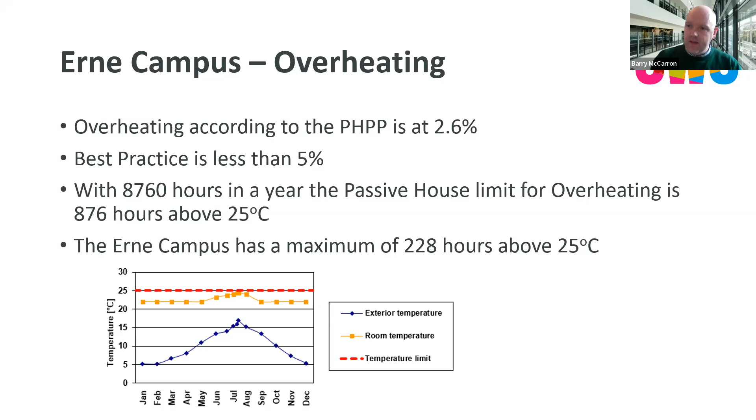Overheating, I said there, 2.6%, which means the building has been analysed for overheating. That's a big plus of going to Passive House certification, is that you can model the building, and the best practice is that you get below 5%. You can actually design it out completely as well, but you will fail to meet the Passive House standard if your building's overheating, and that's a really important point to highlight.

Some data just to throw at you. The average temperatures outside are here in the blue, and you can see as you get into December, they drop off well below 5 degrees C. But you can see that the indoor temperature in the campus has been 21.9 for October, 21.7 for November, and 22.2 for December. One of the reasons for the higher temperature in December is because there's nobody in the building. So the building is in an equilibrium when there's occupancy. The MVHR shuts on and off depending on that. So really good performance.

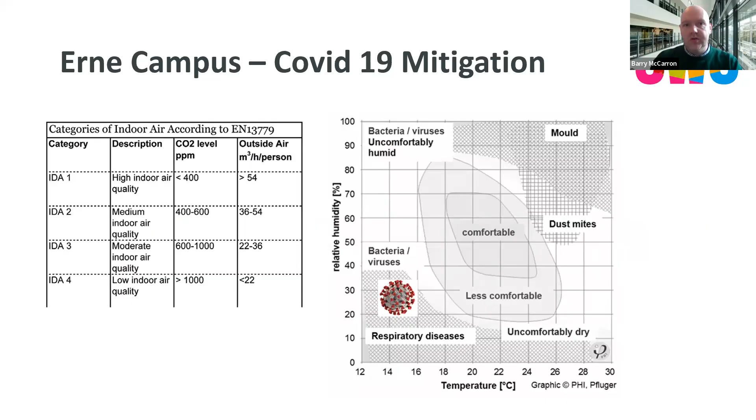And then indoor air quality is another plus of this. I think Andy Frew is on the call here as well. There's been some great work done by the Northern Ireland Housing Executive on a publication about maximising and realising the benefits of Passive House. And they were one of the contributors to this. One of the big benefits to Passive House is the indoor air quality. And of course, in light of the pandemic, that's even more important.

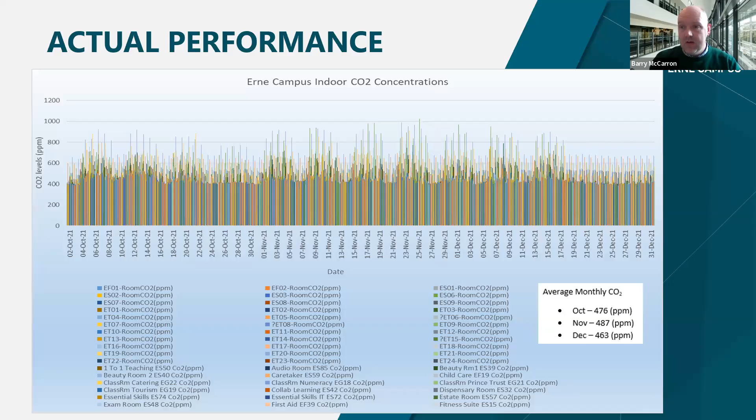We have some data here to show you in terms of what the building is coming out at. Outside, unfortunately, the CO2 outdoor is sitting at about 400, and that's part of the climate change issue. We didn't want to go across 400, but I think the world has just recently gone past 400. But the Erne Campus indoor data from when it opened, you can see month on month, it's sitting at less than 500 CO2. So that's almost the same standard as outdoor air internally, which is great for us.

Costs, some people might want to know about this. You're talking almost 30 million. That works out at about £3,500 per metre squared. I did a wee bit of digging this morning just on that. In 2018, the average price per metre squared of a university building in London was 3,300. So for a world-class groundbreaking construction, it wasn't that we broke the bank either, and the building came in on time and on budget as well.

For us in my department, with the R&D work we've done, this has been significant. We have seen a serious uptake in interest coming to us. We have turned over, since 2015 and getting into Passive House, over $1 million with sustainable construction R&D. And that is a really good outcome for us in the college.

It also allowed us, we were invited to COP26. It was really a proud moment for us in the college, and we were asked to sign an MOU to become part of the UN Centres of Excellence for High Performance Buildings. So we really feel we're punching above our weight in some respects, but we've also done some good stuff. We also have things to learn and a way to go, but we're in good company with respect to that designation that we got.

And we're looking forward to, again, the Northern Ireland community, the construction sector in Northern Ireland, rolling out a series of events around that as well, with being that centre. Inside the college, it's been a catalyst for a number of things, in particular our One Planet Living initiative. So we put in a new sustainability strategy going forward. The college has a big ambition to be the first zero energy college by 2030. Again, we've a way to go on that. We may have bitten off more than we can chew, but we have that aspiration and we're working towards it.

Again, just to conclude, for Northern Ireland, we feel this is an extremely significant building. It's the first passive house premium building in the UK. Right after us, just opening this week, is the new swimming pool and Leisure Centre in Exeter, built to the passive house premium standard as well. I can't remember who's the bigger building, but it might be about to knock us off. There's really a lot happening in the UK in general with passive house. Again, it's allowing this all to percolate into the construction industry. And we're only one of a few where you can come and get training and all the rest.

We have, off the back of this, and it's relevant for this topic matter, we really are now focusing our attention on retrofit. We see the opportunity, we see where it needs to go with respect to embodied carbon. And we have some funding secured to really roll out some initiatives around retrofitting, in particular, the EnerPHit standard as well. So we're looking forward to coming out with that.

The college new construction, the Erne campus, is just an excellent example of how renewable energy should be used. There is no point in putting the cart before the horse, as they say. If you're going renewable energy and technology, and everybody loves talking about all of these things, if you don't have the energy efficiency first to a really low level, the goose is cooked, because later on you're going to have to go back and retrofit, or you're going to need to add more costly technology and renewables. So this is really the secret sauce, I feel.

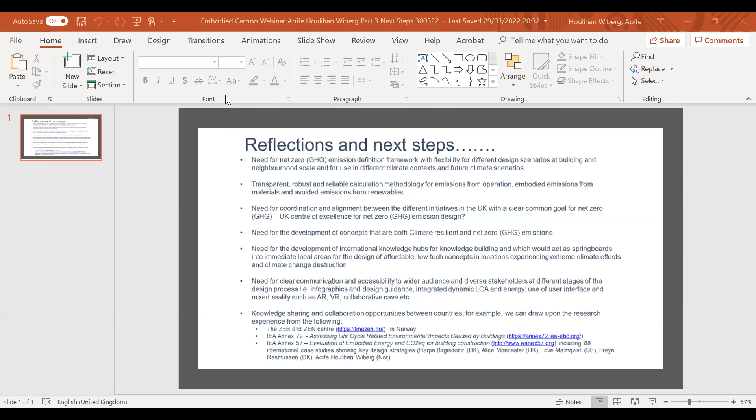You have to come off mute first. I'm guessing we don't have time now to do the education part, the second presentation. Should we skip that and just go straight to the next steps? Yes, I think so, please, just conscious of the time. Yeah, that's fine. Because I think the bulk of the questions have been answered by Natalie doing sterling work there. Can you see my screen? Yes, but not in full screen view yet. Not in presentation, but there we go, yes.

So this is more a general sort of wish list. And it does combine not just embodied carbon, it's also including thoughts around helping us shift towards net zero emission. But one of the first things I would say, from my own experience, is developing a really clear definition. And like I said, from the work that we've been doing in the IEA, to have more of a framework so that we have transparency, but we have flexibility, so that we can have a sort of a stepwise approach to achieving net zero.

So it could be that even some buildings might want to try to achieve net zero energy first, then shift towards net zero emission, and maybe start to think about developing a sort of stepwise, how to say, not moving targets, but like the ZEB ambition levels. So you would have these varying targets, let's say, that different buildings could aim for.

And then, obviously, in terms of the calculation methodology, it would be really great to have a common and agreed approach to that. And a really key element is reliable source of data. And I know that one of the questions has come up about that. I don't know if you want me to mention that now or later, about sources for the UK. Whenever we can in the next 3.5 minutes, Aoife, we must.

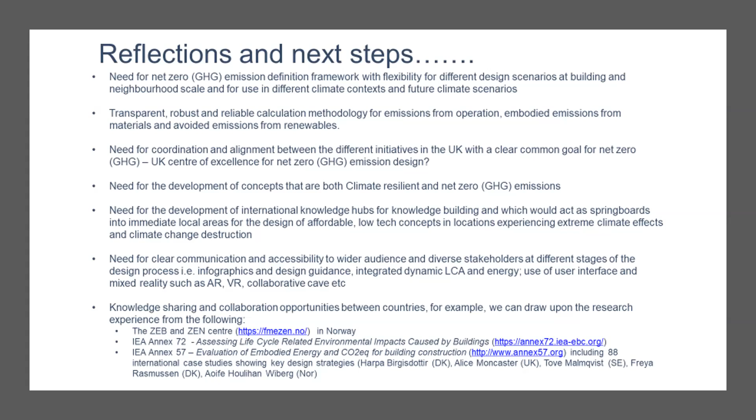Thank you very much, Aoife, just giving us that flavour of what we need to do. Yes, Amy will be distributing the slides. There are one or two that just have to be looked at for confidential information, but they will come round soon, the various presentations. I'm not going to be able to throw it over to the floor. There was so much stuff. It's a quart into the pint pot. But I think we've passed a lot of information over. We need to think then about how we regroup on what we do with this, whether that be government, academia, wherever it may be. But hopefully that and seeing the slides will give people much to chew on over the coming days and weeks.